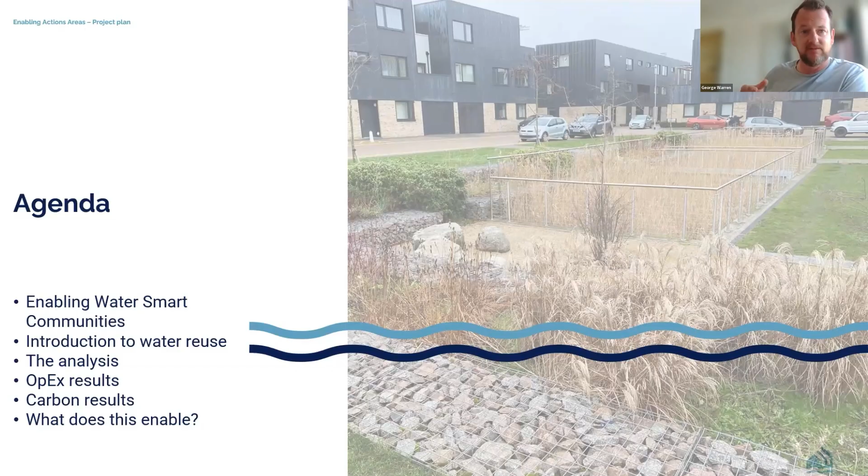But here, don't go straight to that. Freya will go through the key headlines, and then I will round it up with what this means in reality before a Q&A session. So let's give a brief overview of the programme. Next slide please.

So what on earth is Enabling Water Smart Communities? Well, other than being a bit of a mouthful, it is an Ofwat innovation project all about trying to identify and then break down the barriers to integrated water management in new residential development. It's led by Anglian Water, alongside United Utilities and Thames Water, heavily assisted by Arup as our principal delivery partner. You'll see a number of different organisations there, including CIWEM, who are our comms and engagement lead for the programme. We have an independent programme board, which had its 14th and final meeting last week.

This is where we bring together key stakeholders at senior levels to ensure that we're not reinventing the wheel, make us aware of any opportunities, and become our champions for the work that we're doing. It's been exceptionally helpful, and I would certainly recommend such a format for future projects too. Can I have the next slide, please?

So what is a water smart community? Well, if honest, there's lots of potential definitions of it, but I would see it as a development or local community where the residents are aware of and feel empowered to be part of that water system, looking at it in a more holistic manner. So not just seeing it as water comes in, water goes out, rainfall lands on the site. It's looking at how that water is managed throughout the course of its journey, and feeling empowered to be able to do things on it, both to help the environment and more widely the local community.

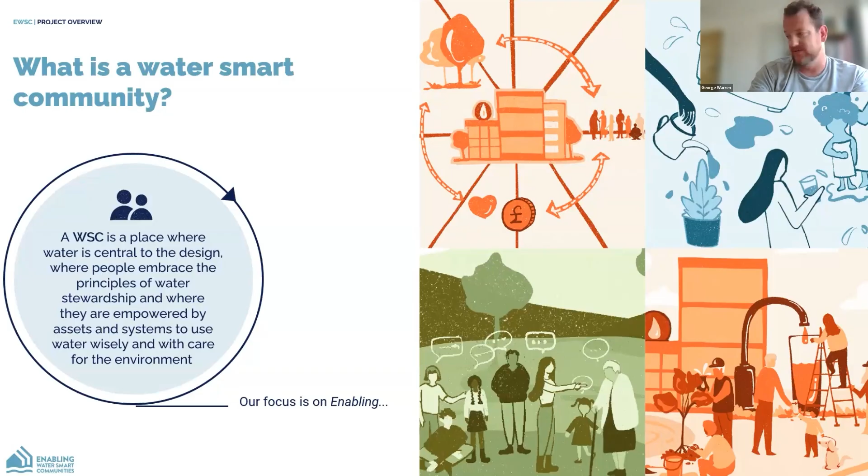Can we have the next slide, please? And I guess these are some key elements that come up throughout. This is a snapshot from one of our latest playbooks, which is just about to be published in the coming weeks, which helps to condense down some of the information on the basis that we have 161 outputs.

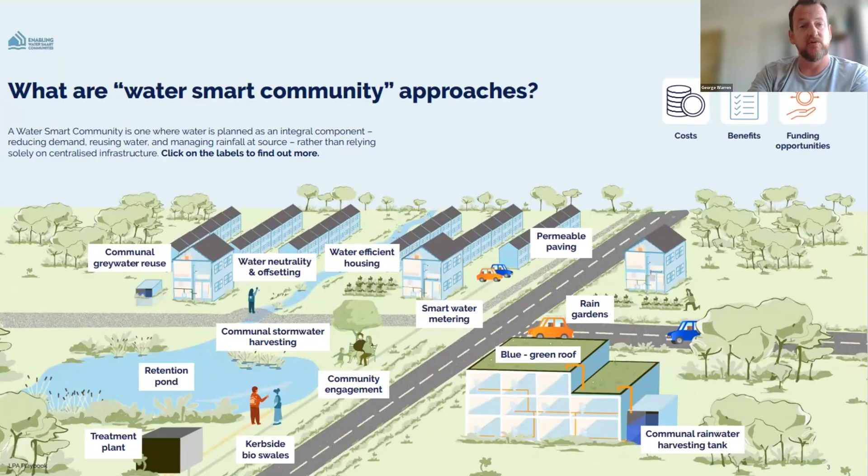So it's quite hard for people to see the wood from the trees. Therefore, trying to hone it down, we're doing a playbook for local planning authorities, one for developers, one for local community groups, and one for urban designers, so that you can quite clearly see what's coming out from it. Can I have the next slide, please?

So in terms of the barriers and enablers, we'll be looking into skills, stewardship and managing assets, the regulations associated with public attitude, and the costs, all of which we've done when it comes to water reuse. I wouldn't say fully completed because this is constantly changing. But we did do a piece of work previously around the capital costs associated with delivering water reuse at individual plot scale and community scale. This piece of work is then looking at the operational costs, the whole life cost, and the whole life carbon aspects of it. So hopefully you're in the right place.

What's great here is that the public attitude is really positive towards such interventions. The regulations are still a bit of a barrier, but I'll get into that a bit later. We're seeing positive movement in the right direction. On the skills piece, that is still a work in progress, but we kind of need regulation to guide us, and we'll start to aim for that in a way. But work is being done on the skills side, and certainly further work on the adoption and stewardship of these is key.

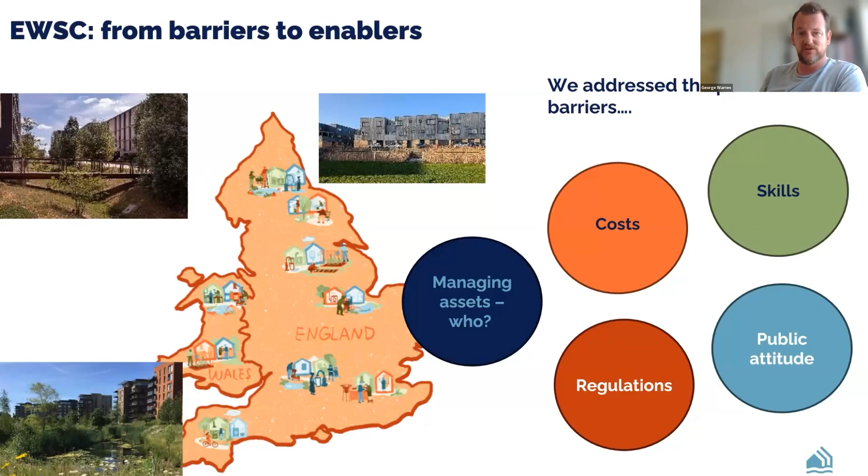Have the next slide, please. So just to briefly show, we've done a lot of work, and this is just a snapshot of it, if honest, but you can see there's a lot of work on water reuse. For those that aren't familiar with what we've been working on, please have a look at our website and you'll see a lot of stuff on there around water reuse and other aspects of integrated water management. So let's go on to the next.

So why on earth are we doing this stuff on water reuse? Well, I did mention before that I was at Anglian Water, and I think it's important to put it into context around our broader water resource management plan. You can't go to one of these meetings without hearing about the jaws of death, despite it being almost a decade ago that Sir James Bevan referenced it. But we have a real issue when it comes to water resources. That won't be any news to most of you on the call. And so we had a real imbalance in terms of demands in comparison to resources available.

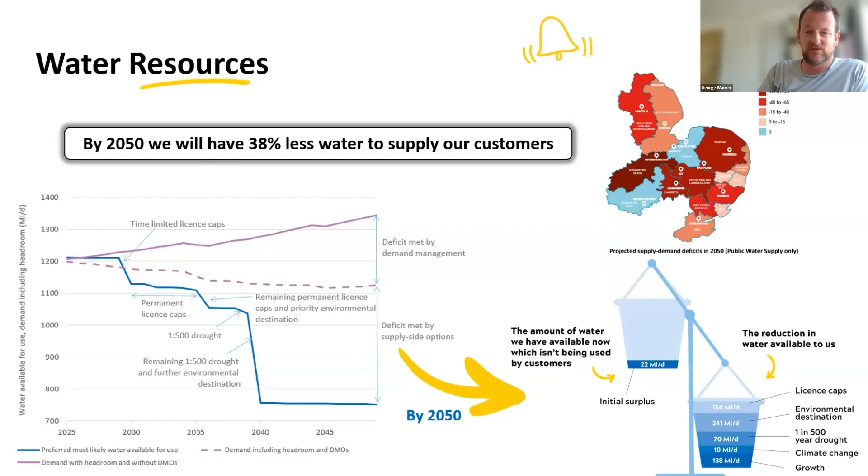Can I have the next slide, please? The way in which our WRMP has tried to balance that out is through a series of interventions. So we have a series of demand management options, some of which we're covering as part of this, but actually there's a large part around water reuse.

So it is forming part of our plan for the coming years, both in terms of reuse in the form of turning non-potable into potable supplies, but also these more localized water reuse opportunities. We drastically need to reduce down the water demand associated with household and non-household means, and this is our route by which to amend it.

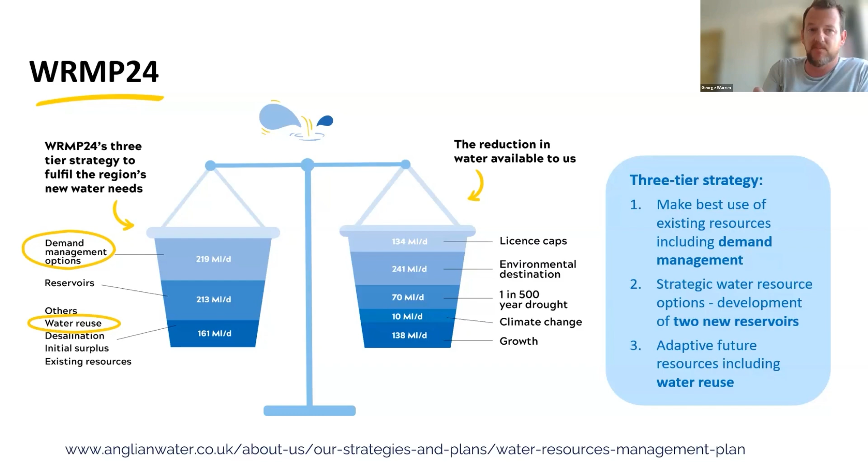And I wanted to put this in there just to show why it's important and what we're doing, and how we're trying to provide a bit more clarity over how it sits in the wider picture. Can I have the next slide, please?

Great. Thank you, George. Hi, everyone. I'm Freya, as George said, from Arup. And just to clarify in case people aren't sure what a public health engineer is, I do water and drainage design for buildings and have done a lot of work on water efficiency and water reuse in buildings. I'm going to talk about this project that we did for enabling water smart communities on the cost and carbon of water reuse.

Before we get into that, I wanted to give a bit of context so we're all on the same page on what water reuse is, and then we can dig into the analysis a bit more. So we've got lots of different types of water reuse options that we can design for buildings: rainwater harvesting, grey water reuse, which is the water from your wash hand basins or showers, which is relatively clean. Then you've got mechanical systems, which you can use sometimes, like condensate from different mechanical systems.

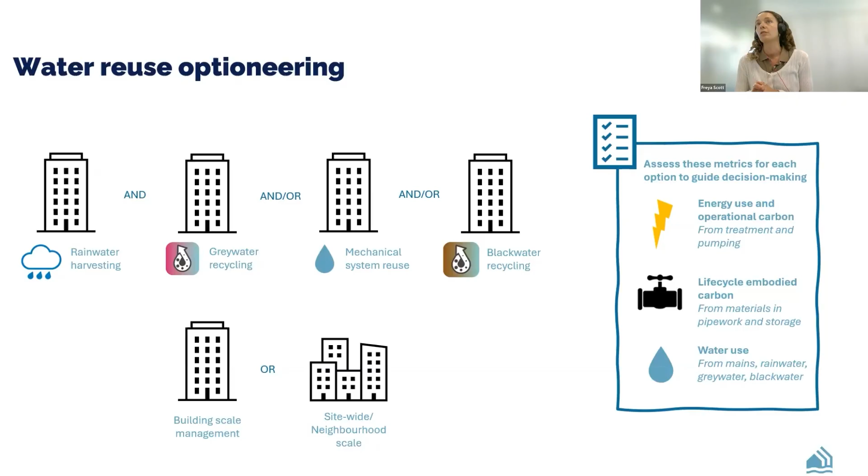And even black water recycling, which isn't as common in the UK, but is an opportunity you can look into. Then you've also got building scale - so that's how you can reuse within the same building, or you have a site-wide neighborhood scale system, which shares a tank and then supplies the non-potable demand across. It's really important to assess which option you'll use for a specific site. There's different energy use and operational carbon things to think about, and the actual amount of water that you might be able to capture. So you always need to do a bit of an optioneering assessment.

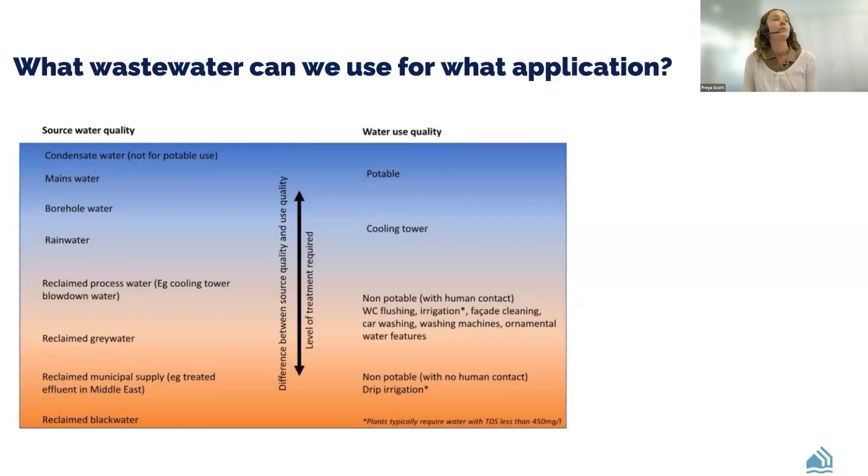Another thing we have to think about is what wastewater can we use for what application. So the source, the quality of that water, and then the use is really important to look between. In the UK, we don't typically treat reused water to a level where we would use it for potable consumption, but we would use it for WC flushing, irrigation, things like facade cleaning, washing machines. And in homes specifically, we'll use it for those purposes - WC flushing, washing machines, and irrigation, external use.

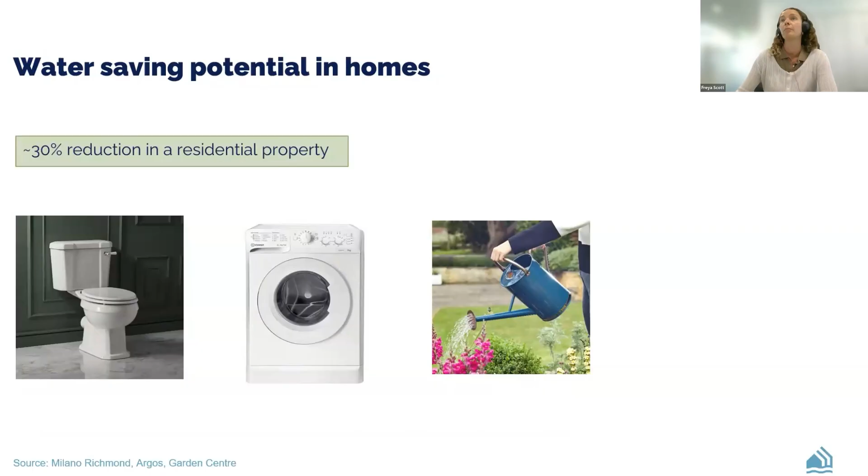There's a potential in residential houses for about a 30% reduction in your water consumption if you are looking at 110 litres per person per day. But this will be much more if you're actually using more water than this and you'll have a big flush volume, or you're using lots of water for irrigation. So that's kind of like a minimum that you probably would be able to save by implementing water reuse.

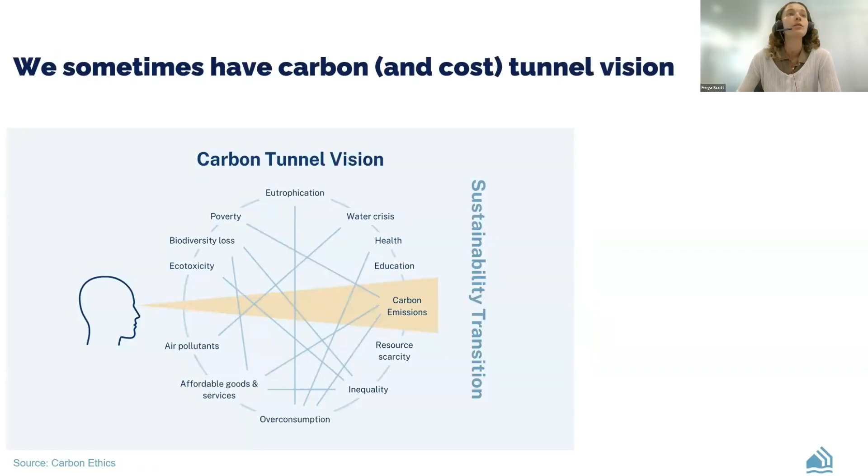Often in the building world, and in sustainability at the moment, we have this really big focus on carbon emissions and also cost, but it's really important for us to not just think about this and think about sustainability more holistically. Some frameworks like doughnut economics and the Sustainable Development Goals are really important and can help us think of how all of these different sustainability pressures can balance each other out, like biodiversity, flood resilience, water scarcity, things like that.

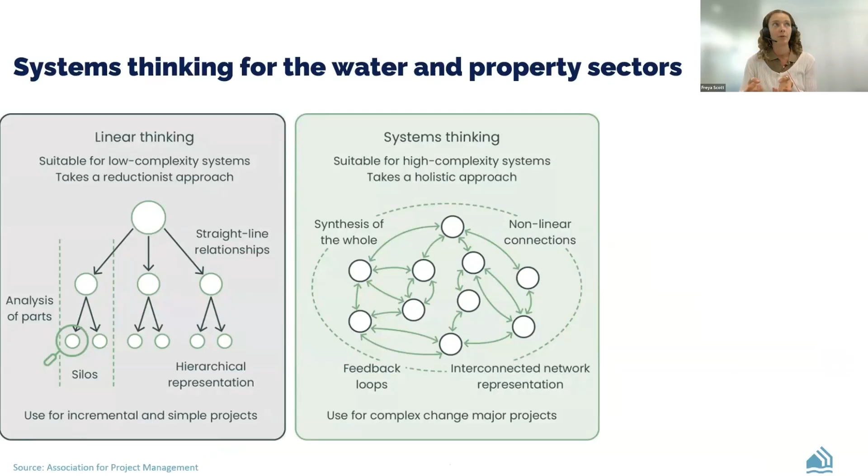Even more important for the water and property sector, because we have so much influence on each other. We have so many growth pressures at the moment for housing and also businesses, but there's constrained water resources and there's a bit of conflict, and we really need to have this systems thinking approach which can help us work together to solve some of these problems.

So that's a little bit of scene setting, and then now I'm going to talk about the analysis. So Arup undertook this assessment, and we had Siraj who was leading it, and then we had our civils and infrastructure team, then we had the buildings team, and we had a water team, and we all did different tasks within this, which I'll go through in a little second. Our main question is: what is the whole life cost and carbon of different water reuse systems?

And if we split that down, we want to carry out the operational and maintenance costs because, as George said, we've already done that CapEx assessment. So we want to see what the whole life cost will be across the whole lifespan of a building.

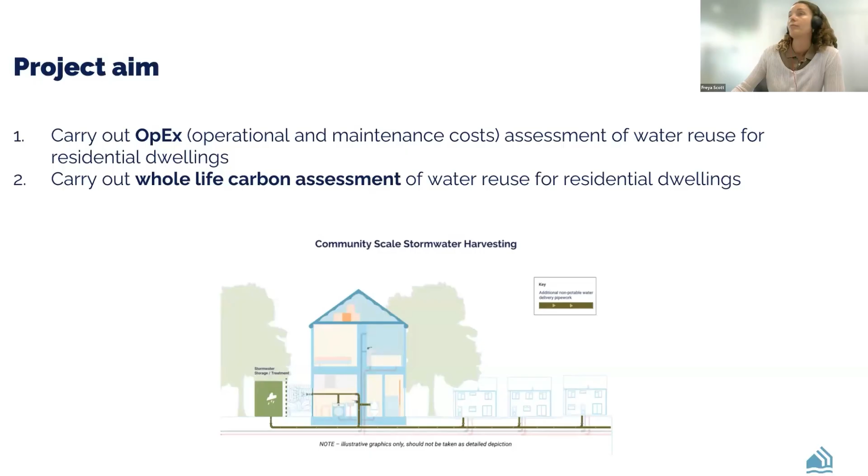And then also the same for a whole life carbon assessment of different water reuse options. This is a really big problem in the building industry. A lot of developers will ask how much this will cost throughout the whole lifespan, and there's not very much data on this at the moment, especially for carbon. We're learning more and getting more data, but we need more information to give people confidence in the designs we're providing. It's a really important piece of work, and I think it would enable a lot more people to feel comfortable with the solutions.

So the methodology we used: we went through the sites we were given. There were several different sites, which I'll talk about in a sec, and we defined the different parameters for them. Then we reviewed the bills of quantities for these sites, which included all the materials used. We undertook the cost analysis separately, along with the carbon assessment, and I'm going to show you all the results for that. Then we did a comparison between those sites and the reuse types.

So we got given about 12 sites, and they all had different characteristics. This was a good way for us to compare how different sites might be more cost or carbon efficient for different water reuse systems.

They included some low density sites, so typical housing developments with gardens and roads between them. Then a mid-density site, with mid-rise apartment blocks of 1, 2, or 3 bedroom apartments. And then really high density sites, like student accommodation or dense 1-bedroom or studio apartment blocks, which might have communal kitchens, with much more limited external area compared to the other two density types.

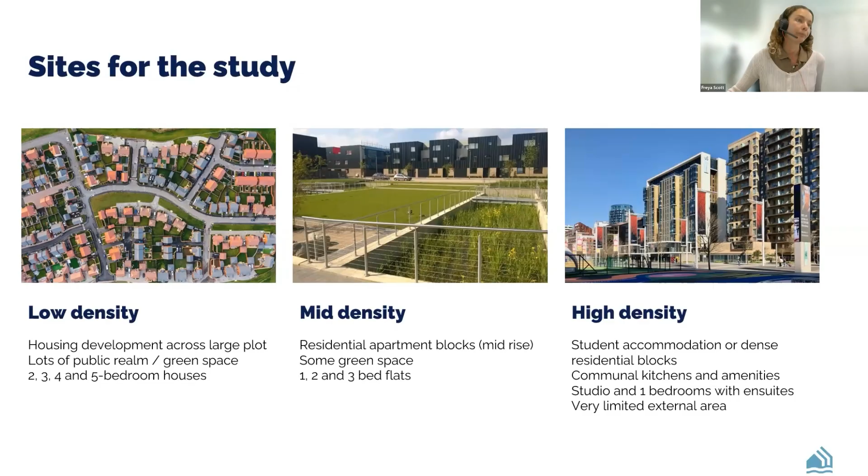We also decided to consider these different types of reuse options. We didn't include black water recycling or mechanical systems for this. Obviously you could combine some of these water reuse systems, but there's an infinite number of ways you can recycle water, so we had to stick to these ones.

So we've got grey water reuse, which I spoke about earlier - that's your wastewater from showers and basins. Then we've got rainwater harvesting, collecting from the roofs of buildings, which is also really clean, so it's quite easy to treat.

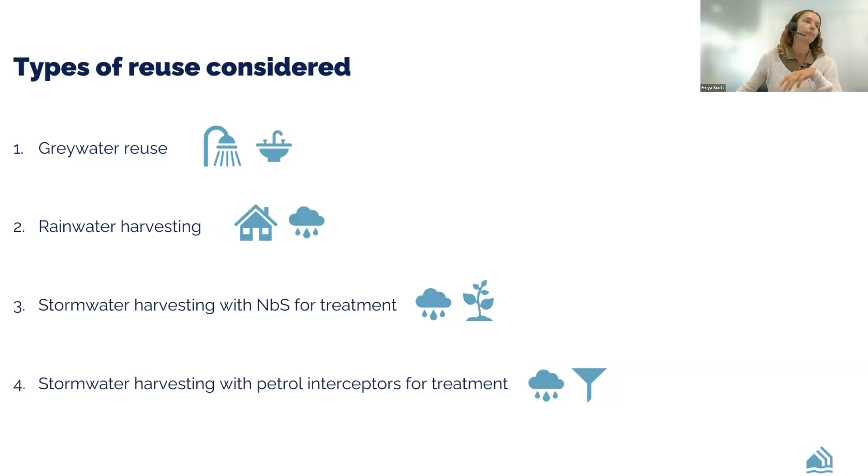Then stormwater harvesting, which we split into two. One uses nature-based solutions for treatment, like reed beds, which filter out the stuff you might get from roads and the ground, since your roof has a cleaner rainwater supply. We also compared that to stormwater harvesting with more grey infrastructure, like a petrol interceptor, rather than nature-based solutions, just as a comparison.

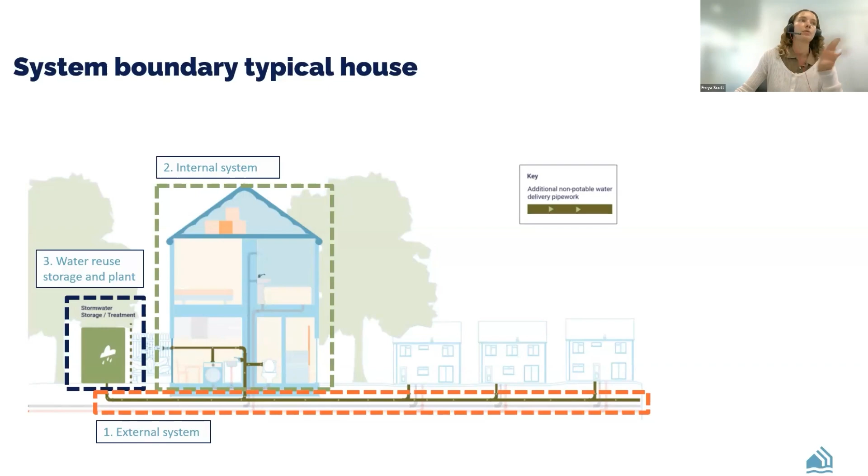We split them into 3 different parts so you could add them together depending on your site type. This is a typical house on one of those low density sites, but if you've got a high rise, high density site, it really changes the proportions of the system. You've got a much smaller external system and a much bigger internal system. I wanted to point that out before we go into the results, because it shows why different sites might have very different results.

So, the cost analysis.

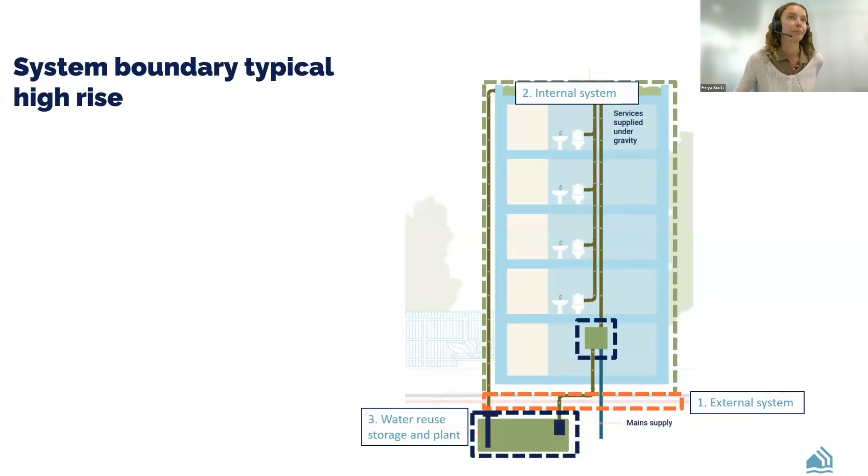The operational cost—as George said, we've already done the capital cost, which is the upfront cost you'd pay when you install the system. Your operational costs are your maintenance checks, so someone coming in to check the filters or make adjustments, and your repairs as well—there might be a leak or something that happens over the lifetime of equipment or material. Then there's also replacement. All of our building services or mechanical systems have lifespans and are due a replacement after a certain amount of time. You can check it and say this pump is running fine, I don't need to replace it, or you might just fix something, but every piece of equipment does have a lifespan. And then there's also the labour for the work—people coming in to do these maintenance pieces or get the replacements in, that's included in this cost assessment as well.

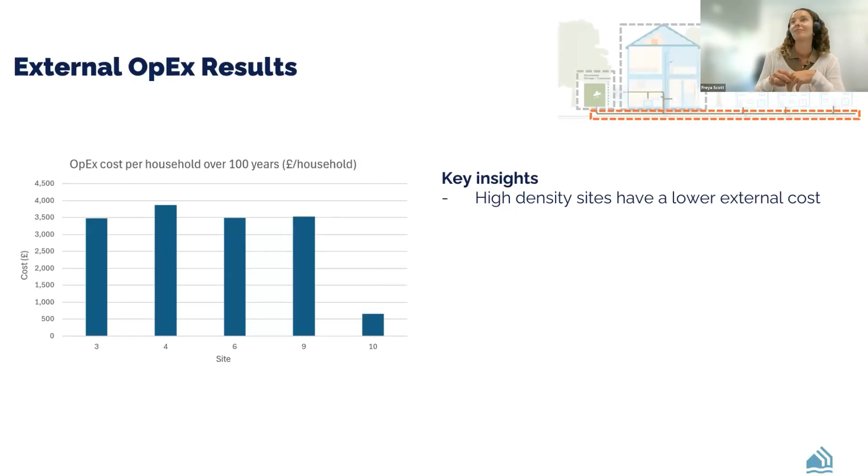So into some of the results. Firstly, we've got the external results. Not all of the sites had external and internal bills of quantity, so this shows the ones that had external results. You can see that site 10 has a really low cost associated with it, and that's because it was one of these quite high density sites with loads of apartments in it. So per person, there's not much external stuff there, so it's not very expensive.

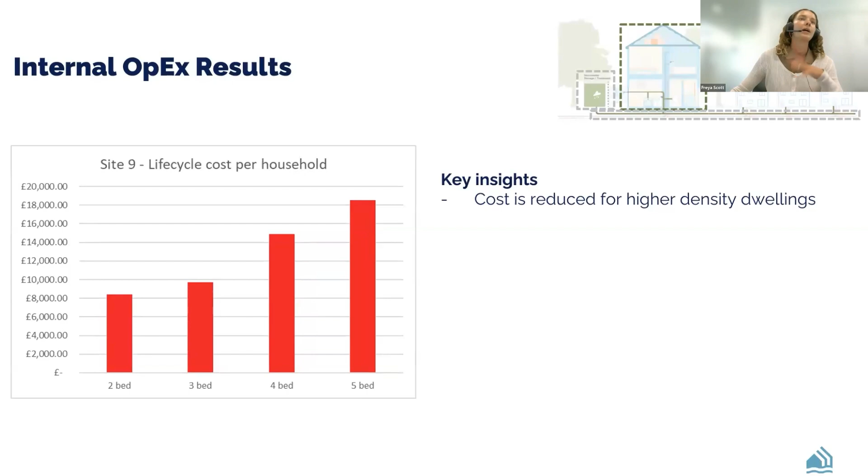Internally, we zoomed in for the internal results as well to give a bit more of a picture of what it will look like between different housing sizes—so you've got 2-bed, 3-bed, 4-bed, and 5-bed here. The cost is really reduced for higher density dwellings, and per person, a 5-bed is going to be cheaper than a 2-bed, but that's only if the 5-bed has 5 people in it, which you can kind of assume, but they will reduce per person.

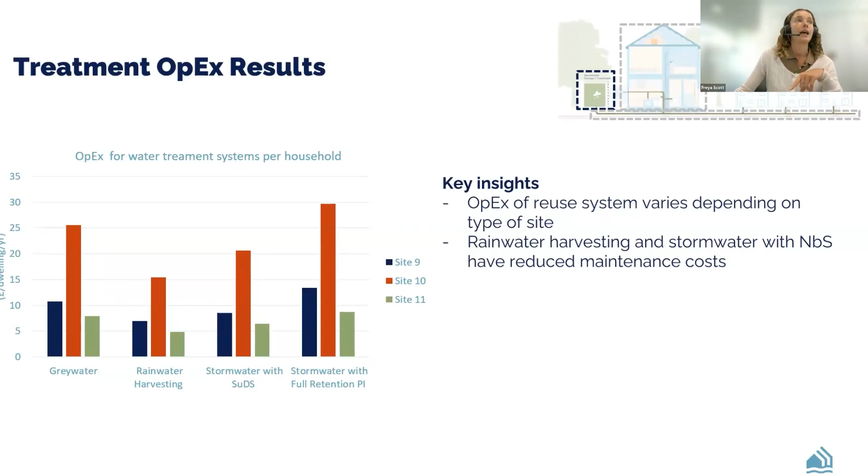And then you've got your treatment costs as well. For this one, the operational costs for certain types of reuse are a bit higher—rainwater and stormwater with the nature-based solutions were cheaper to maintain, so that's why you've got the reduced cost here. We did this assessment for sites 9, 10, and 11, and that's showing a bit of a summary of this one.

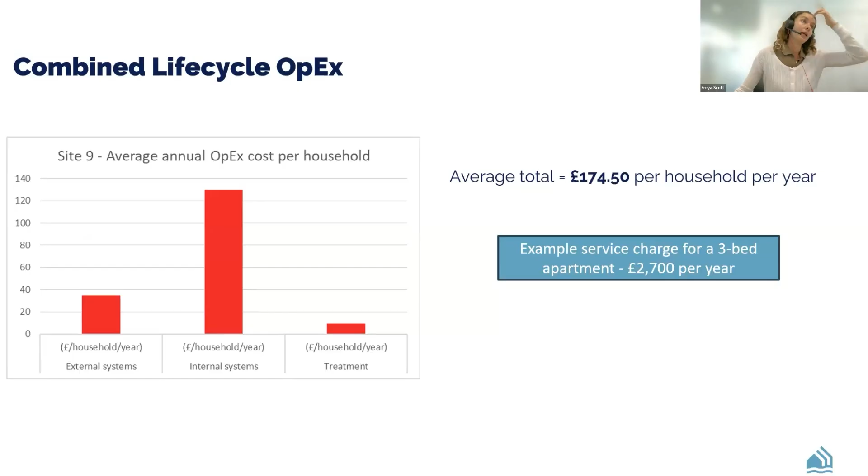We were quite conservative with some of these costs, which I'll talk about in a bit more depth in a sec. When you take that average across all of the sites we analysed, it's about £130 per year for a 1-bedroom and £220 for a 5-bed household. Comparing that to water bills, you can really see that's where you're starting to actually save money, or potentially save money depending on how much your water bills are—especially with costs of water bills rising, or expected to rise, it could lead to a cost saving in the future.

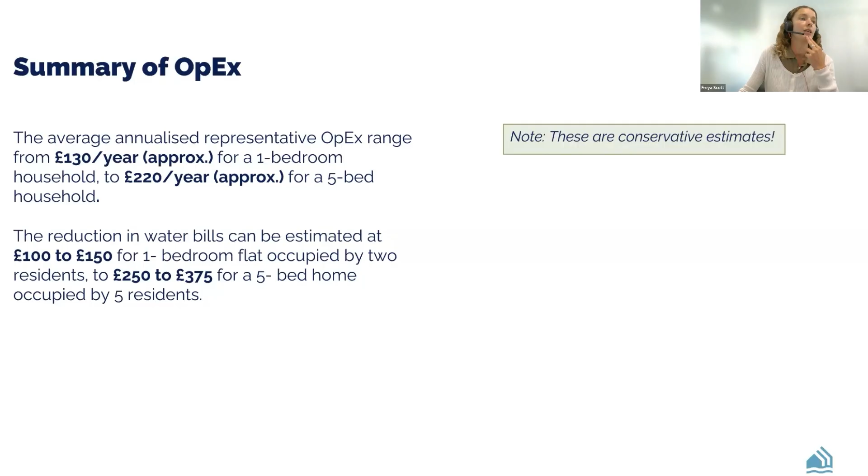These cost estimates are really conservative because, as I was saying, all these building materials and pumps and things like that have a lifespan. You probably won't have to replace your copper pipes every 25 years, but we have to use a benchmark, and we use the CIBSE guides for this. We were really conservative on this, and we're expecting the maintenance works for people to actually go out and do these to reduce in the future, as water reuse becomes more widespread and commonly used. So next, I'm going to talk about the carbon assessment.

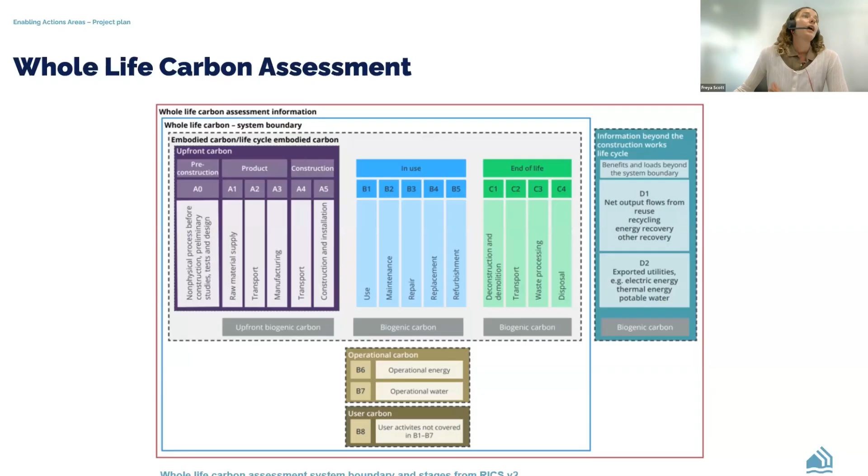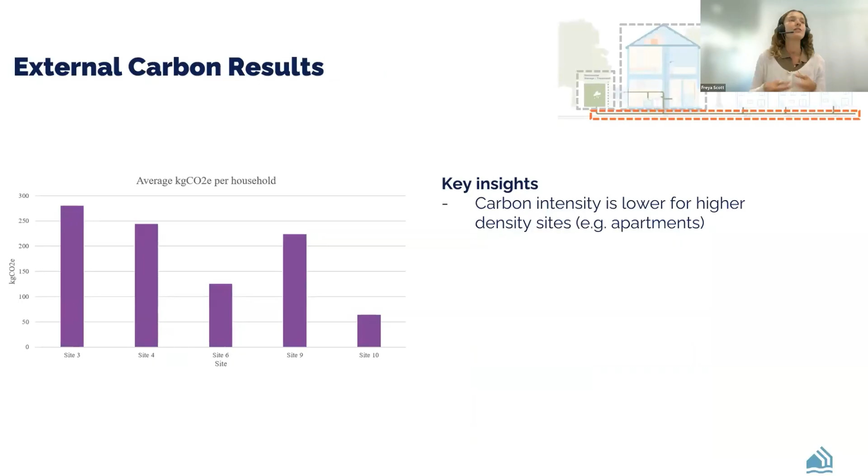I'm going to go through all of the results that we got. So external carbon, we did this across the site, so sites 3, 4, 6, 9, and 10. You can see the average CO2 emissions per household here. Site 10 had the lowest, and that's because it's a higher density site.

So we're being quite conservative here, same with your wastewater pipework. You don't necessarily need to double this pipework - you probably would have two drainage ducts anyway that would be taking the wastewater away. So there are definitely efficiencies of the drainage pipework that we didn't include, just to give a bit of completeness. You can pull out some of these numbers from the report if you need that information.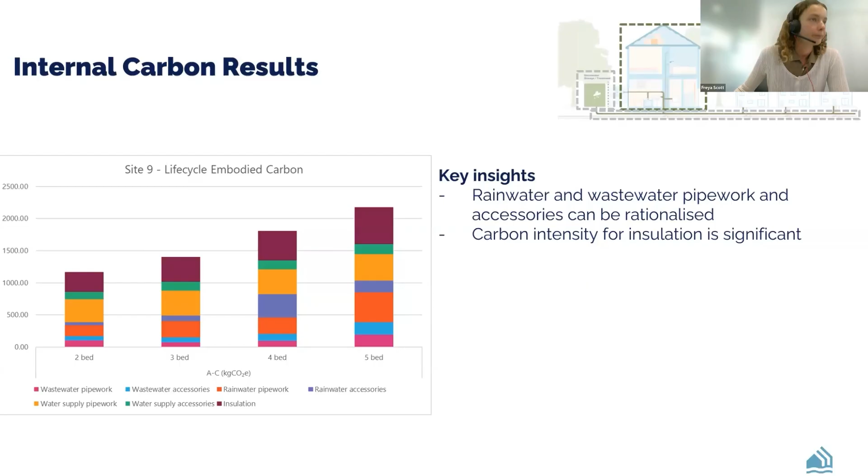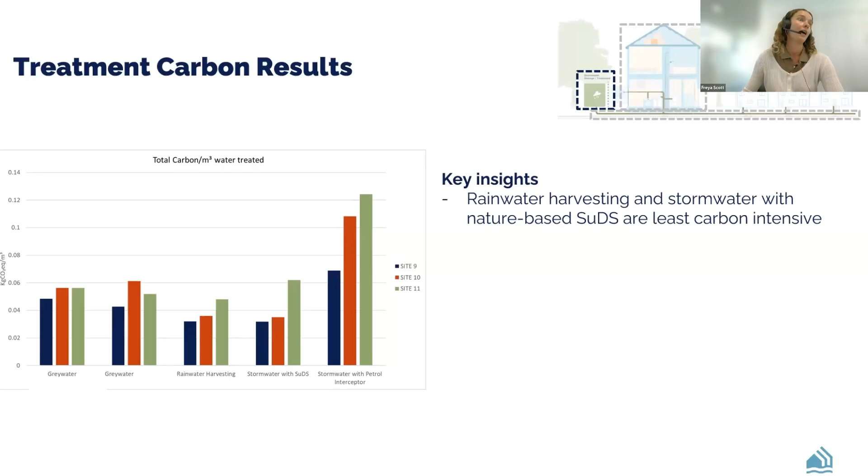Nice to show that as a bit of a picture as well. Rainwater and stormwater need less stuff, so that's why they cost less, but also it means they have less embodied carbon in them as well. Then combined, for site 9, this is the average again - the average total is 1,994 kilograms of CO2 over a 100-year lifespan.

That probably doesn't mean much to most people. It doesn't really mean that much to me either, because we normally will do this as an equivalent per meter squared, and that's how we compare these carbon benchmarks within the industry. Our study was over a 100-year lifespan because that's normally what you would do for external systems, and we should really be pushing buildings to last for as long as possible to make them sustainable. But a typical reference study period for carbon is 60 years, so I've converted our kilograms of CO2e per meter squared into a 60-year one, which is about 9.25 kilograms of CO2 per meter squared.

Just to give that some context, if we think about a heating and domestic hot water system for a house, that's 14.4 kilograms of CO2 per meter squared. For apartments, it's 26.1 kilograms of CO2 per meter squared. That source is from the Future Homes Hub benchmarking of carbon document.

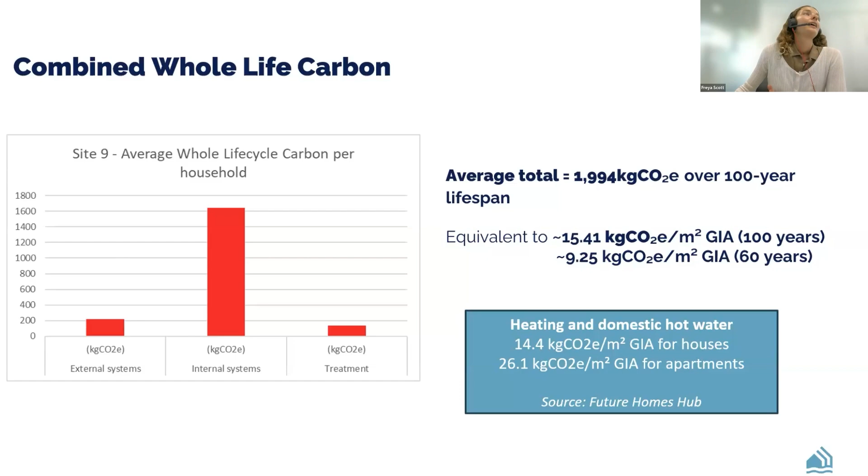So a bit of a summary for the carbon. These really ranged from different types of apartments, and the greater number of dwellings sharing a system really reduces the carbon - you're getting economies of scale. You're reducing the amount of carbon per household if you have a denser site. So it's really a better option, or can be a better option, if you have sites that can share systems really easily. And again, these are really conservative estimates because the lifespans that we're using are quite conservative.

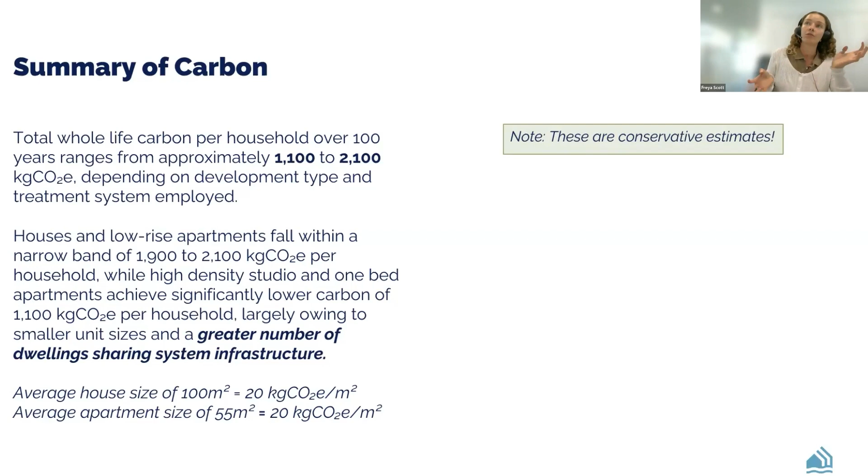We also did it over that 100-year lifespan, so if you compare it to industry benchmarks, they might be using a 60-year lifespan. So just something to keep in mind there.

We didn't include this in our actual whole life carbon assessment, but there can be some of these carbon savings associated as well.

So your B7 emissions are the emissions associated with supplying water and treating wastewater for buildings. If I was doing this for a project, I would look at the carbon factor for the water company supplying my water and wastewater in the region, then multiply that by the volume of water I'm using and the volume of wastewater I'm discharging from my site. That gives you these carbon factors.

If we're reusing water, we're offsetting some of our water consumption, and we're also reducing the amount of wastewater we're discharging from our site. So that's reducing the carbon from the water companies in the region - it's sort of a bit of a carbon saving. It depends on where your site is, how much impact that's going to make.

These were just some sources we pulled from, but it really depends on if the water company is using recycled water, if there's desalination - that would be even more carbon intensive - or black water recycling, that kind of thing. So it's very strategy and location dependent, but definitely something to keep in mind, especially for the future, and thinking about if it's beneficial to decentralize within this whole system. How can the water companies and developers work together to see what is actually the best water and carbon solution for that site?

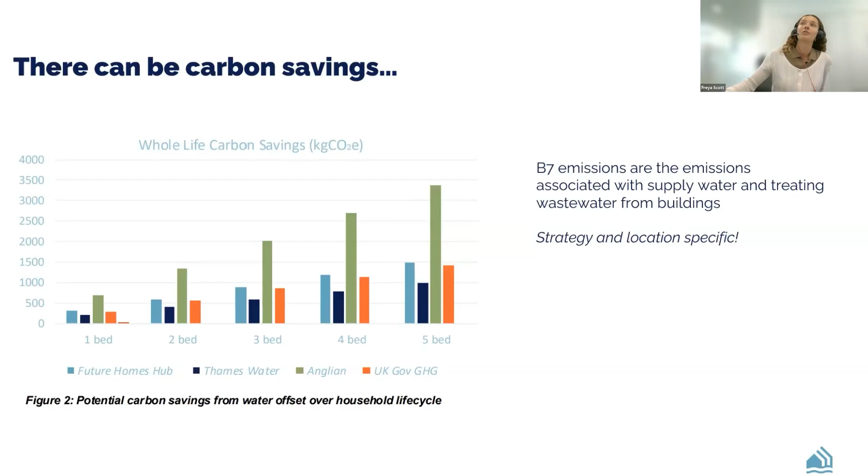So, just going to summarize now some of the key insights and findings from the results. Water reuse is more affordable than assumed for the whole life operational costs - about 130 to 220 per household per year, but obviously depends on the type of site, the density, and what system you're actually using. It's really important to do a full design of this and figure out what's actually happening on your site to see what is the best solution.

Something we didn't investigate in this, is that if you're refurbishing versus a new build, there's a much bigger opportunity to be cost efficient in a new build than a refurbishment, which is something to think about.

We can also offset these further by environmental incentives, which water companies give for new residential buildings. This is another EWS work stream - there's a really good report standardizing the different environmental incentives you can get. This includes water recycling, so rainwater and grey water, and other things like SUDs, but not within this study. Definitely something to think about, reducing those costs more.

The cost of water reuse can be comparable to some of these infrastructure upgrades - things a water company might be delivering within their region to provide more water for a site. It could actually be cheaper to put water recycling within a site instead. So why are we not doing that? And then delivering wider benefits to that site in the future - something to think about with that systems thinking type of outlook again.

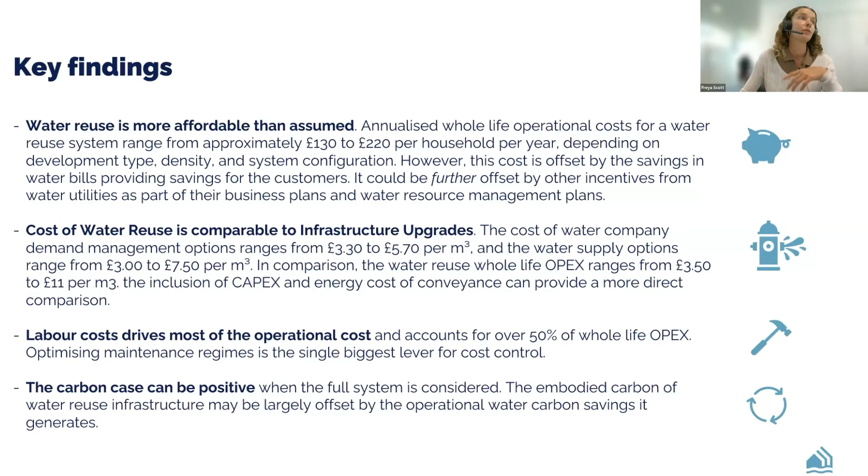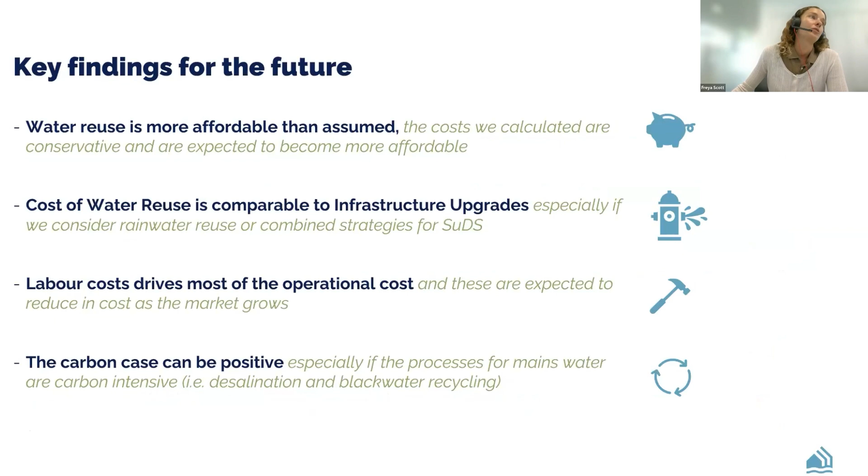I think I've already answered some of these questions. The costs we calculated were conservative, and it will become more affordable, especially as things develop in the future. The water reuse is comparable to these infrastructure upgrades, labour costs are expected to reduce, and then the carbon case can be positive - I've been through those already.

Just to finish off, that's loads of information to give you, and I've tried to zoom in for the external, internal, and treatment systems into certain sites, to give you a good overview and comparison of them. But I would really recommend reading the non-technical executive summary report, which is on the EWSC project page.

And then there's the technical report if you have a bit more time. It goes through every single site, showing what the results were for each. You can start seeing a bit more of a story on student accommodation - it doesn't have any external infrastructure, costs and carbon associated, and it's got these hallways that share infrastructure, so the cost is split per person and there's savings there. Lots of nuances for different types of site, really interesting to review and think about for your different types of buildings.

That's great, Freya, thank you so much. Geez, well, that was a whirlwind tour through quite a detailed piece of work. Thank you, Freya, for covering all the elements - you showed there how it was a real team effort, so appreciate that not all of those elements were necessarily your fair hand. Please be kind with questions coming forward, as we may have to take some of them away to feedback to the team and come back to you.

But so in terms of reuse - can I have the next slide? One of the key things to come out whilst we were doing this piece of work was a publication from the Drinking Water Inspectorate and an expert group's recommendations. You'll see a number of those in here, which ultimately a greater clarity on the costs and operational costs associated with it will be really helpful.

It may also lead, if their recommendations come into fruition, to the introduction for instance of maintenance and performance standards, that may well have a knock-on impact upon the indicative costings we've produced here. We'd like to think we've got this covered in terms of what we've tried to estimate as the maintenance and inspection regimes, but it may well have an impact. There's other things in there too around mandatory registration systems and the likes. So there's something to be mindful of.

Ultimately though, this is a real positive in terms of moving in the right direction here. We are, as a nation, very protective over the quality of our drinking water. We have world-class drinking water, despite what maybe some certain news streams might tell you. And we need to make sure that's not impacted by the addition of an alternative, possibly lesser quality source of water within the building.

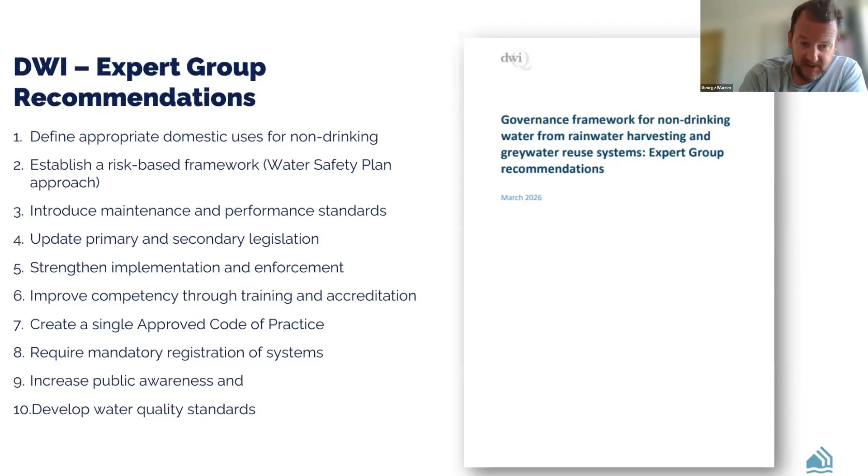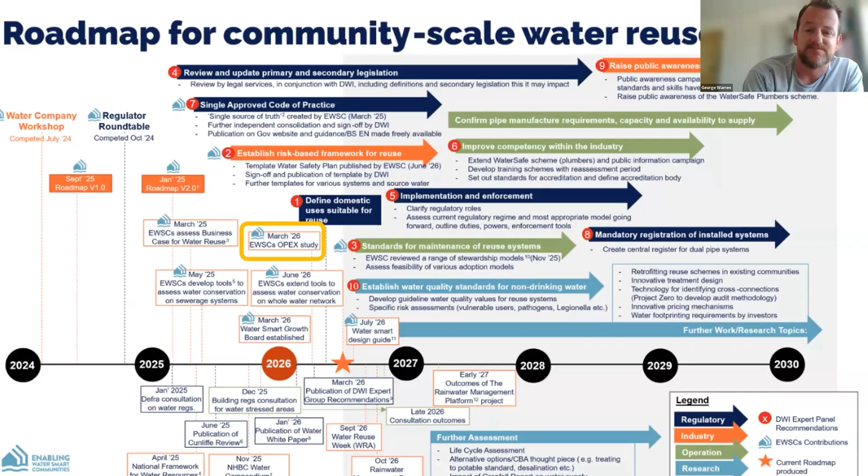I think if you press the next slide, just to show what that piece of work we're talking about here today - that's the one I've circled there in gold. Okay, next slide, please.

Let's go to the next slide, please, Freya.

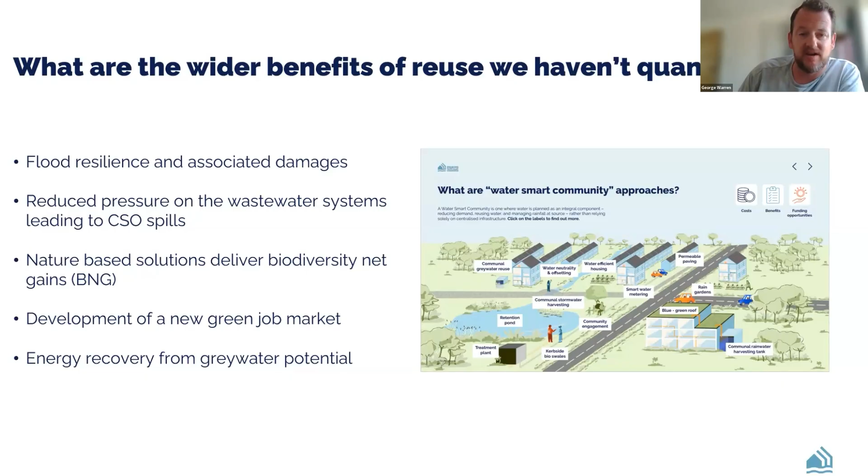We do have a bit of an issue in that we still have this wholesome water barrier at the minute. The Water Industry Act 1991 states that all water suppliers should supply wholesome quality water for domestic purposes - wholesome, supposedly equally potable. This is primary legislation and isn't easy to change, but there is certainly momentum around amending it in some form to allow for such community scale reuse systems.

There's an opportunity, assuming we can get over that barrier, which I'm fairly positive we shall - and certainly those sat within DEFRA and MHCLG seem supportive - of trying to amend changes to see this come through in building regulations. One of the things Enabling Water Smart Communities is pushing for, amongst others, is the mandating of such systems for developments over a certain scale. We're suggesting over 100 properties or more, and that figure comes from our costings associated with capital costs.

Others have done something similar. We think that mandating it and giving a lead-in time gives some clarity for the development industry, and also we need to be doing this. So we would like to see it in building regulations.